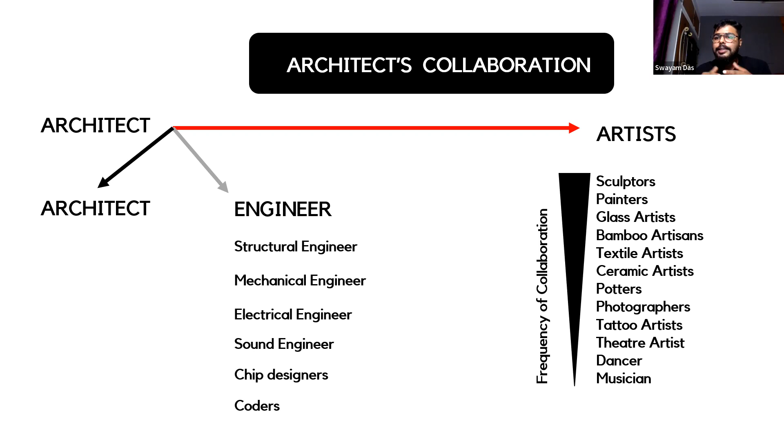As I said earlier, whenever architects and artists collaborate, it's just like getting back to your roots again, because when architecture came as a field of study, it started from all the art schools. Let's get on to some examples now.

Now, collaboration is a word I want to broaden. Whenever these kinds of commissions come for architects, they generally tend to link one of the artists with the client, and the client hires them. This keeps them on the same level.

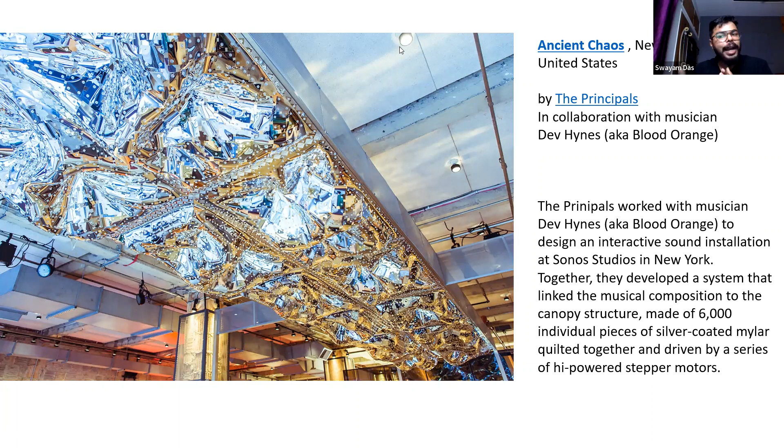Whenever we say collaborations, we generally tend to merge our ideas and discuss them. But are ideas the only factor of collaboration? Maybe not. There are more things that affect or matter in collaborations. Let's look at them.

At last, in every collaboration, though we are working mostly for earning, an economic understanding has to be there. If the economic understanding is a problem, it will actually hamper the project.

So there are two types of collaborations: one really unhealthy kind, and the other a healthy one. What are the factors that determine these? Well, it's just a perspective. The previous factors I ran through mold your perspective, and every person has a different kind of perspective. But how does it affect any collaboration? Let's see.

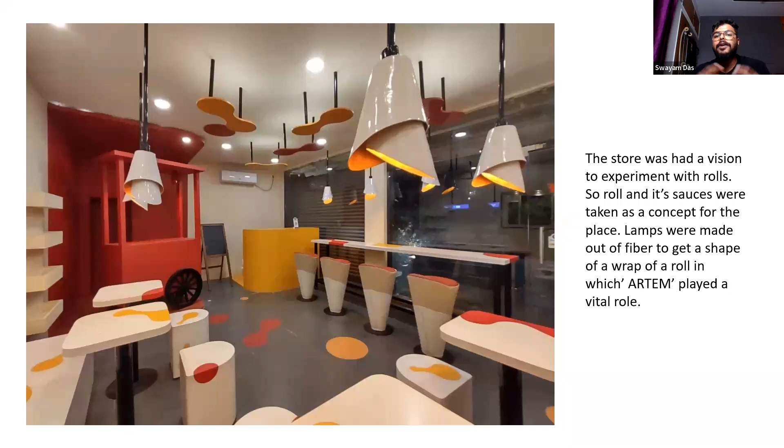The lamps were designed to imitate the wrapping shapes of the rolls. For this, mostly we collaborated with Artem as an art studio for developing these kinds of shapes through fiber as a material.

These are a few overviews of the place. This is already constructed and running right now.

This is an interesting project: Ma Mangala Basti. Basti in Odia means slum. This is mostly an art project. I collaborated with two parties: IBI, and Dibyushman Jena, also known as Yantra Purush. IBI, being Intelligence in Building Infrastructures, is a Canada-based company that works in Bhubaneswar for its smart city development project. Dibyushman Jena is one of the more well-known muralists of Odisha. IBI got this project and wanted both of us to collaborate with them on generating artworks for the branding of this space.

The Basti had a social hub. In Odisha, every Basti has a social hub for themselves, and these needed to be branded. This was part of a national competition in which more than 175 Bastis were given to different groups for urban design by government agencies in different states. We also participated with IBI in this competition.

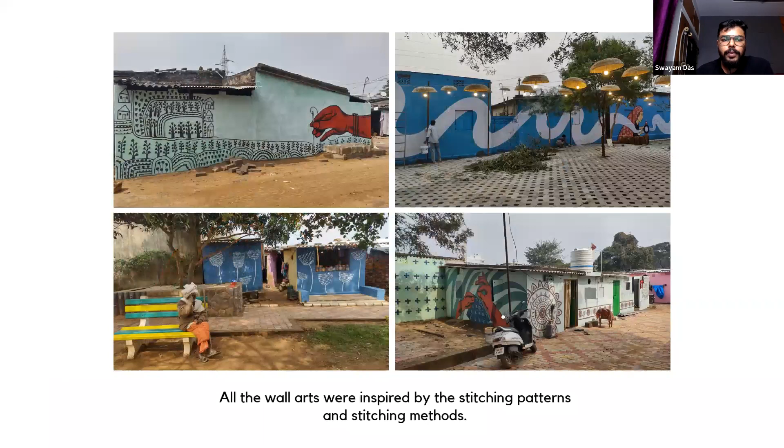The slum mostly had residents whose profession was stitching. The self-help group that resided there was based upon stitching, and we wanted to brand that. So we came up with simple illustrations that could do that. There are a few glimpses of that.

Now, being in Hyderabad and executing personal projects in Bhubaneswar was a bit tricky, but we still managed to participate in a competition for a 120 Battalion. They wanted a healthcare unit lobby for themselves, in Bhubaneswar itself. So I collaborated with two of my friends who have their firm in Bhubaneswar, because they needed 3 options and we had just 1 week, so a collaboration was necessary given the short timeline.

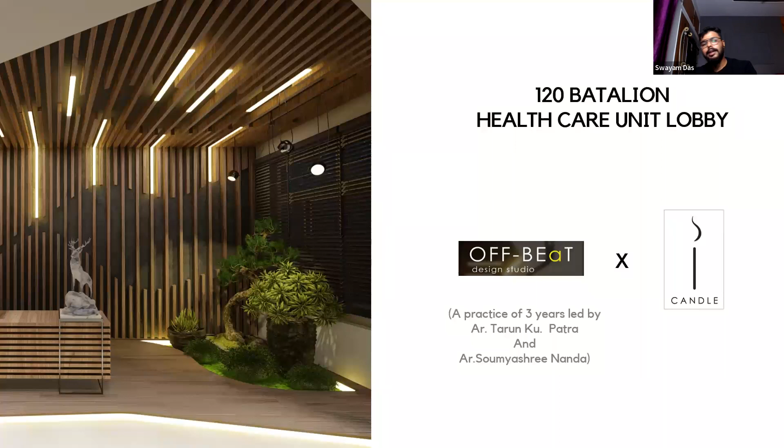We came up with these 3 options in 1 week. You can see how productive it became, because for one person coming up with 3 options would be tricky. We all had our individual ideas, but we discussed for almost 1 to 2 days based on sketches and Zoom calls to understand our next move and how to develop it further. Once the discussions were done and all the ideas were set in place, we all worked upon our individual ideas for 2 to 3 days, and then discussed and reviewed continuously to get these results.

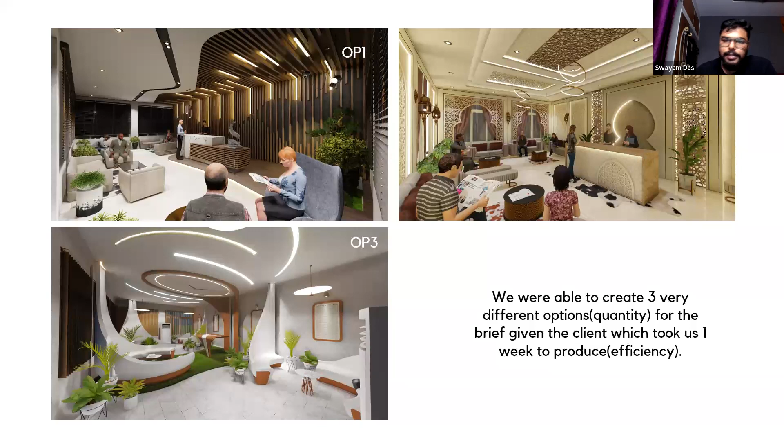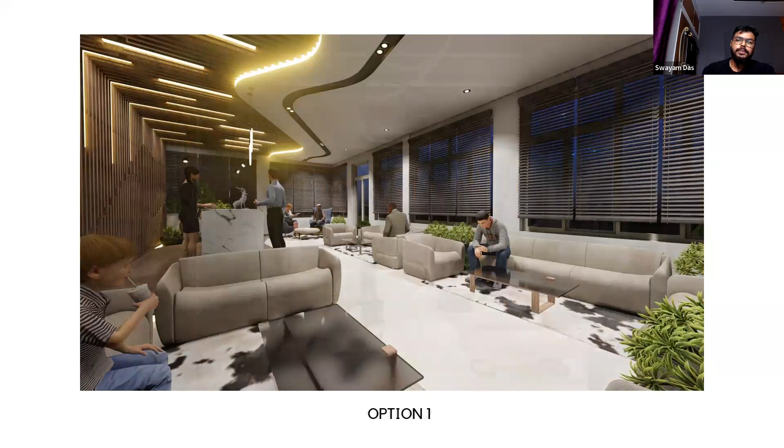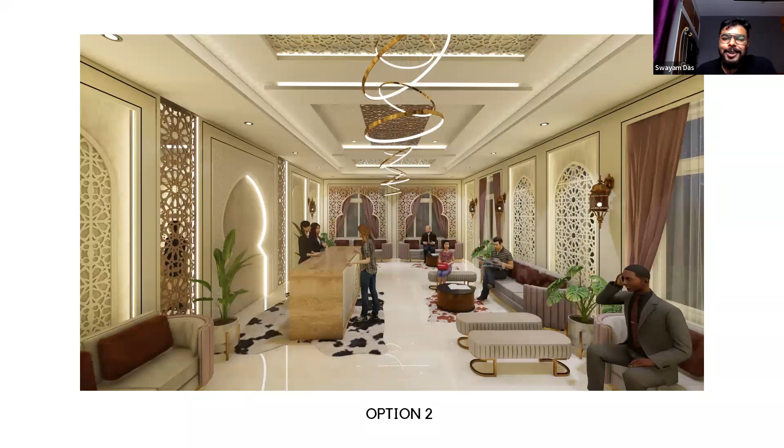This is the first option. This is the second option, which was mostly based upon their brief. Their brief was that they wanted something Islamic and royal, so we wanted to show them what that could look like. But we were not very happy with this option.

This was conceptualized based upon sanitation and different auditory and lux level balances for the comfort of the patients.

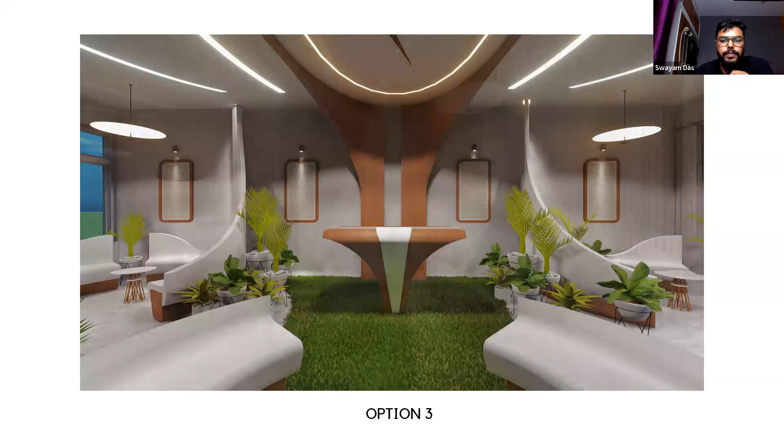The next thing, after I came to Bhubaneswar, we collaborated to cater to a large scale project. This is a competition that we won in January. This is Sageoak Ville, a 3-acre complex with 32 premium villas in it.

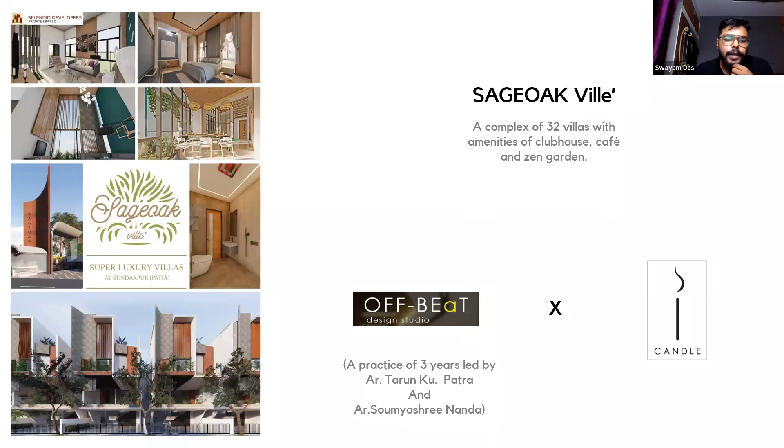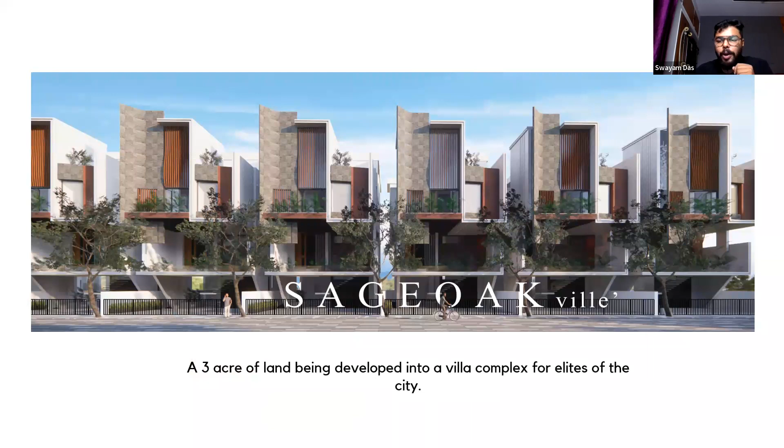A 3-acre property, working on this competition in just 1.5 weeks. Well, it was a trouble also, and for that we collaborated and we won the competition. There are a few glimpses of that place that we designed.

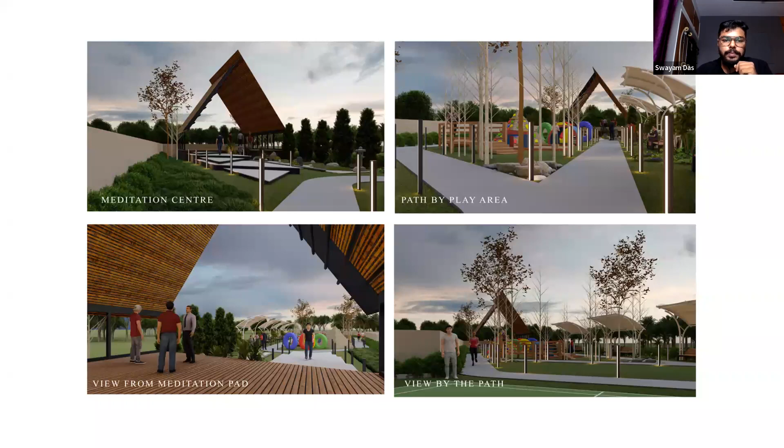The story of collaborations again continued. One of my seniors runs a practice in Bhubaneswar for the past 10 years, called Cityscape Architects. After seeing one of the restaurants, that is the roll store, he wanted to collaborate with me on this restaurant.

This is known as Momoway, a franchisee that comes from Nepal. This is their second international store and the first one in India. They had a previous design language in Nepal that they were not very happy with, so they wanted us to generate a new design language for them. Now, this is what we came up with.

They had a norm of using a duct for ventilation, but a duct in a restaurant started looking like an alien to us. So we tried to mold it as a dragon using fiber as a material. In the further parts, we came to know that the budget was going really overboard, because the duct itself would have cost around 9 lakhs, which was 4 lakhs above people's budget.

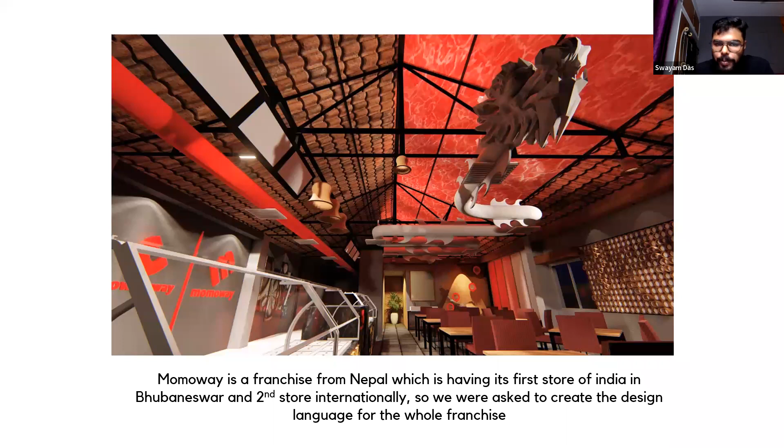But these people were somehow very interested in keeping the dragon. So for this, we collaborated with another artist group, which is helping us develop this dragon now. These are the parts of the dragon. This is in the process. Within 15 days, this project is going to get completed.

Here the artist Sanjay and his team are working upon the scales and patterns of the dragon. We wanted it to look like a Momo-inspired dragon, so it has to have its own scales, the folds have to be right, they have to look like wontons from far off, and it has to be white in color to depict momos. Once it is completed, I might share the pic with Tushar and you guys can take a look.

This was the exterior section of it.

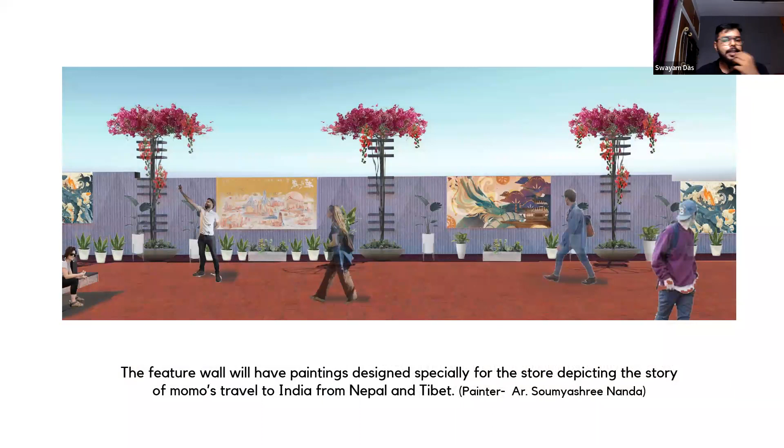Being a graphic designer myself, I always feel that any painting, any graphic, should be very specific to that project. They shouldn't just be bought and put down. It should be designed for the project.

So here we again collaborated with a painter, architect Soumyashree Nanda. She happens to be an architect and also runs her own art practice. Here we studied the history of momos and how it started as a provincial food from Tibet and from Kathmandu in Nepal. Both the momos are quite different, and we looked at how they traveled from the northeast regions to India. We are making a collection of 8 paintings depicting this movement from Tibet and Nepal towards India.

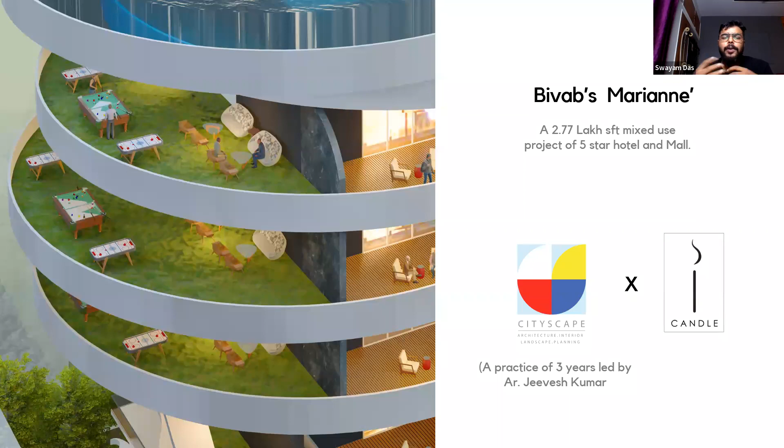Again, a large scale project for which the time was just 5 days to complete the competition design. Here were 5 people, 2 from Cityscape and 2 from Candle, and 1 from Bivab's group itself. We collaborated over this and made a design for this competition. This is mostly a marine life based hotel and retail space.

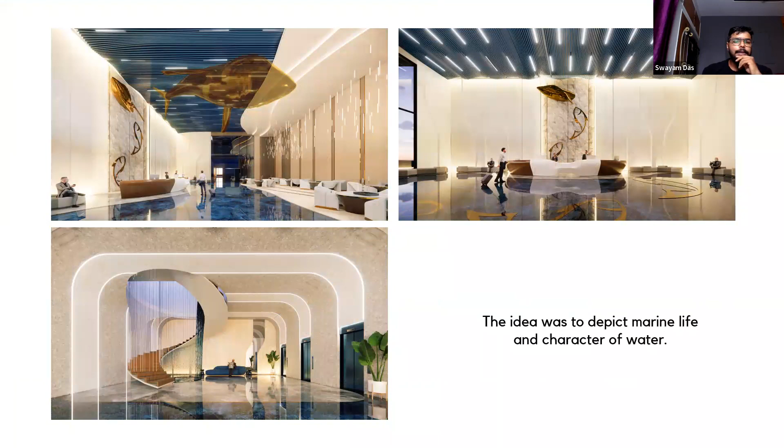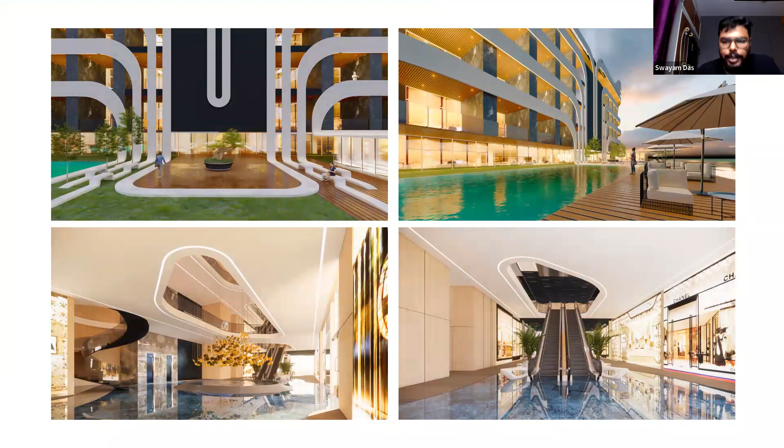To cater to this large scale, the collaboration worked really well. These are the sky deck spaces in that hotel. We just won part A of the competition and we are into the financial part now. This is part B of the competition.

This is the most special project, and maybe the last project in this series that I'll be showing. This is my first collaboration actually, when I came to Odisha from my job. This is called Mor Mitti. Now, Mor Mitti was not just a project, it was like a movement for Simdega. Simdega is maybe a name that you guys have not even heard of.

Simdega is an aspiring district in the state of Jharkhand. It's situated on the border of Odisha and Jharkhand. It's an aspiring district in which people are still starving, not getting jobs, not much skilled. But the nearby villages have a few skilled bamboo artisans, have skilled potters, but they don't have much exposure towards built environment.

So when Mor Mitti as an organization came to me, they wanted a structural intervention to promote their culture of bamboo, to promote their culture of tribal food and hospitality. So this project emerged, and they also wanted to generate employment in that place. That's the reason I'm saying this is not just a project, it was a movement that was started. Now it employs around more than 60 people.

For this project, I had to stay in that village for 3 months, understand their lifestyle, have food with them, stay with them, understand their own language, understand how it would be really easy for them to understand what I am communicating. After 3 months of staying there and designing this with them, we started off the process.

So all the engineering and everything was done by me and another engineer from Simdega itself. We taught them how to make trusses. People were really skilled in understanding bamboo as a handicraft thing, but though they had less exposure towards the built environment, the collaboration and knowledge sharing happened really well.

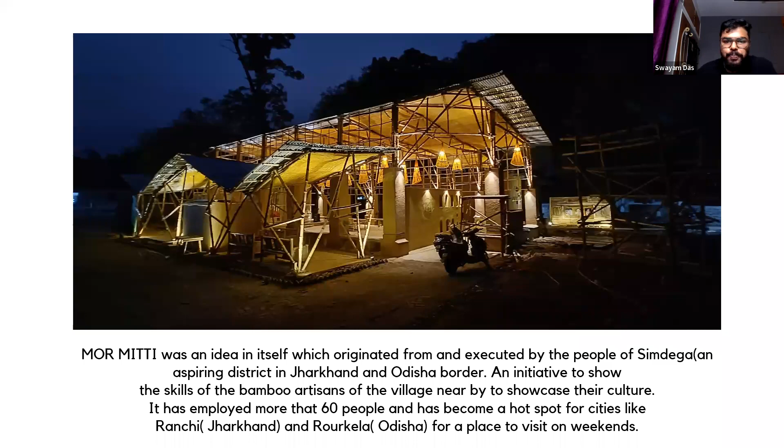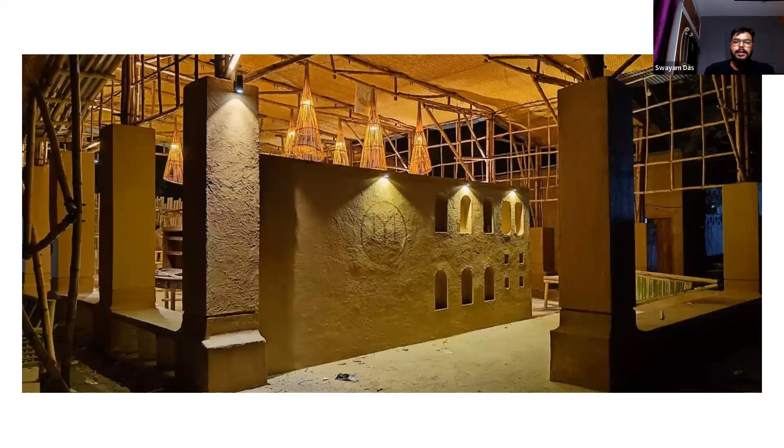I didn't mention his name earlier, but I'm mentioning now. This is Sashi Shekhar. He is a national level sculptor and a relief artist. Relief is basically what you're seeing on screen right now - any kind of wall mural that is 3-dimensional is called relief work in art. He once walked into the place and asked us, can I do this work myself? So he took a 2 month period and put all these textures on all the pillars and walls of this complex. This collaboration was offered by him.

Here all the projects, the whole project, was done on a social work basis. So we all learned from each other, learned each other's culture. It was really, I'll label this as the most healthy collaboration I have had till now.

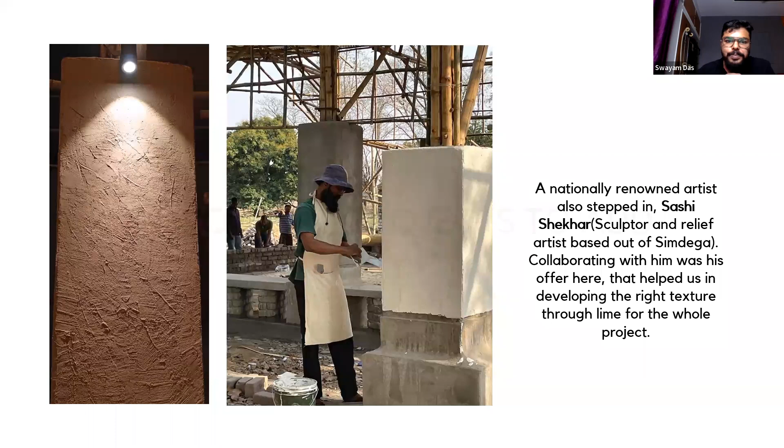So after this experience of collaborating with people, I have started seeing collaboration as a tool for young architects. Collaborations will help you in achieving different scales. Though you look as a team to the viewer, so the client will have more confidence on you. And being a team, you can actually work more in lesser amount of time, which saves a lot of time.

Discussions generate, which filter every decision that you take. Though you have a set of contacts and people you're collaborating with also have, so it helps you with networking as well. Knowledge base and experiences are quite different for you both, and you can share them to expand the bank of knowledge that you people are having.

As I said earlier, with a team, you will be able to always achieve a quantity, and with discussions, you will always be able to achieve quality. So both the things are assured when you are collaborating. So if you have a new idea you want to explore, let's collaborate. Thank you.